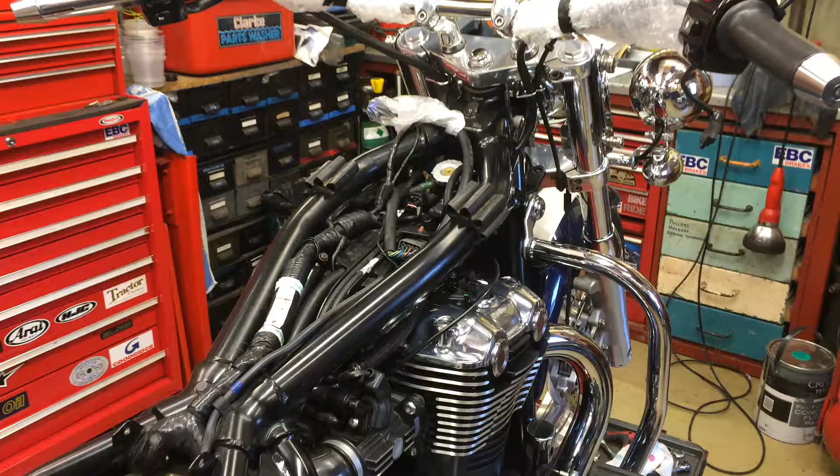Okay, this is the fifth and final video in my series of checking and adjusting valve clearances on a Triumph Thunderbird 1600. It's a recap of where I am to date. The job is finished.

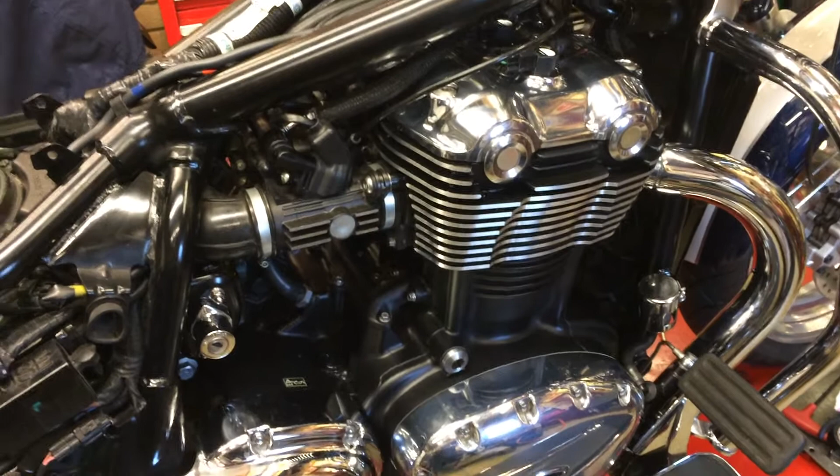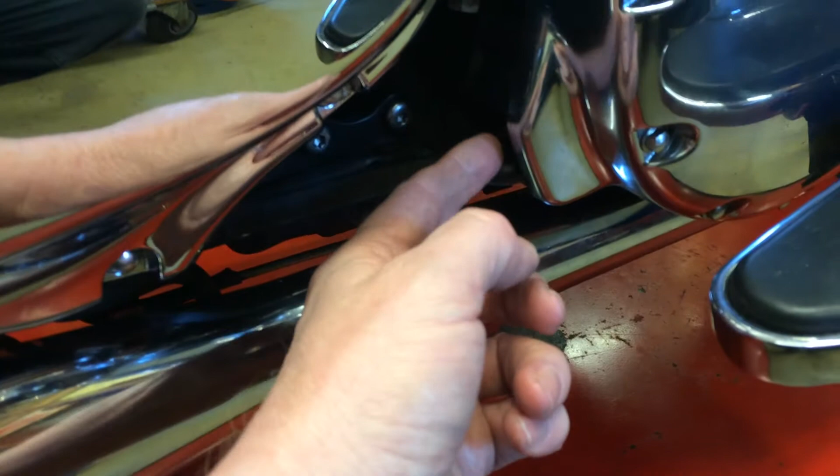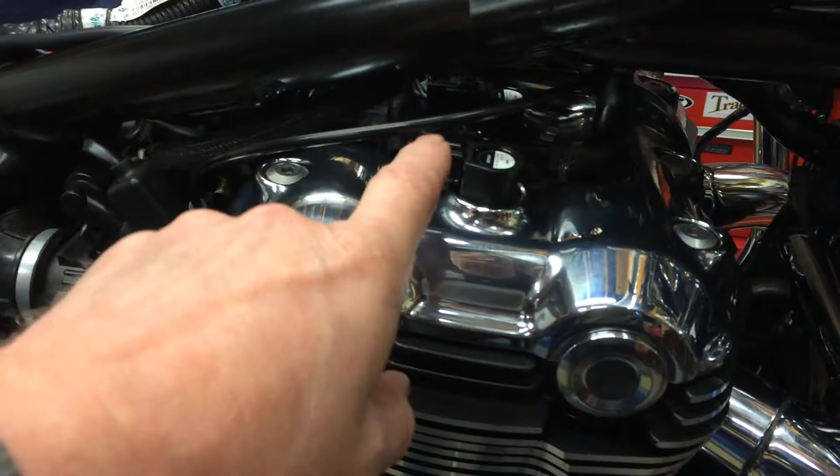Last video I was just in position where I was refitting the alternator cover and I'd got to put the cam cover back on. So the alternator cover, straightforward, a new gasket between the sealing faces. I'd already in a previous video put new sealant around the back of the grommets, which take these two cables, one from the alternator and one from the crankshaft pickup. Case goes on, torque it up to specified setting, then the cam cover goes on, a bit of a jiggle to get it in, and I also put a new seal on there as well.

On the seal itself, there are four D sections, two at each end, and you have to put a small amount of silicone sealant on the cylinder head before you fit the new seal.

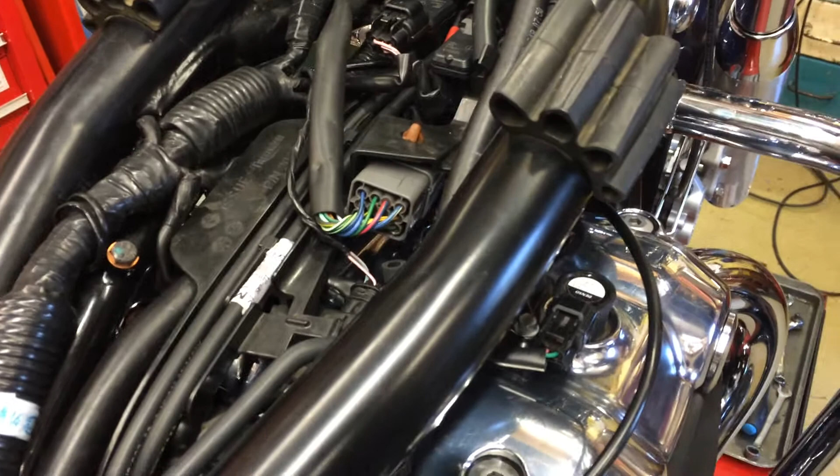Once you've got the head cover or the cam cover back in place, you have to just lift it up again so that you can refit the cam end shields, which I believe are purely cosmetic, and have an O-ring on the back to hold them in place and secure them. Torque the cam cover down, that goes down to 12 Newton meters, and there is a specified torquing pattern in the manual.

Once you've got that done, refit the spark plugs. Because it was a 12,000 mile service, I was putting new spark plugs in anyway, so they were gapped. Put them back in, and you torque them down to 20 Newton meters. Refit your coil packs, get your connections back onto the coil packs before you put anything else in.

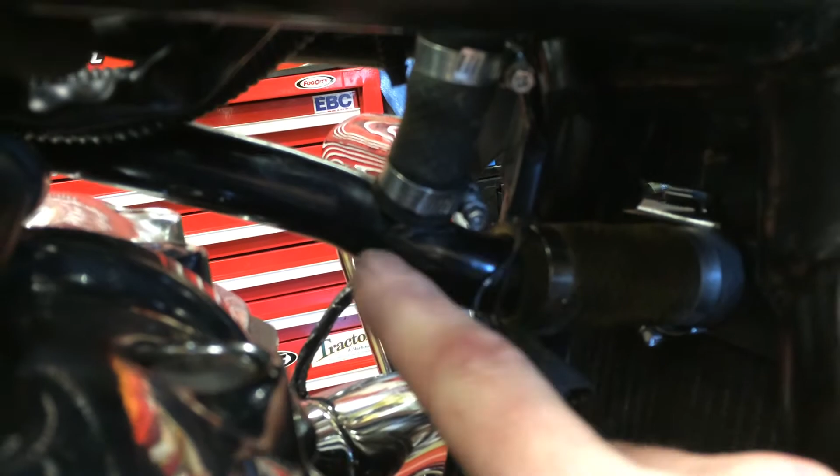So once you've done all of that, the next thing to go back on is this coolant pipe that runs right across the top of the cylinder head. Simple, just a reversal of getting it out really. It slides first into this radiator top hose, so slide that end into there and then drop the back end into the thermostat housing, which is in there. Tighten the clamps up, then refit the filler hose here, tighten it, clamp up, and then that just bolts back onto the frame underneath the headstock.

Fill it up with coolant. I've used this Motul Motocool. It will mix with anything that's already in the engine, and I thought I was going to get away with it. The engine specifies 2.2 litres, and I thought because I hadn't done a full engine strip I'd probably get away with 2 litres. I didn't. I had to go back and get another bottle. So you can see I've had two full ones of these and that amount out of there. So you do need to get the right amount of coolant.

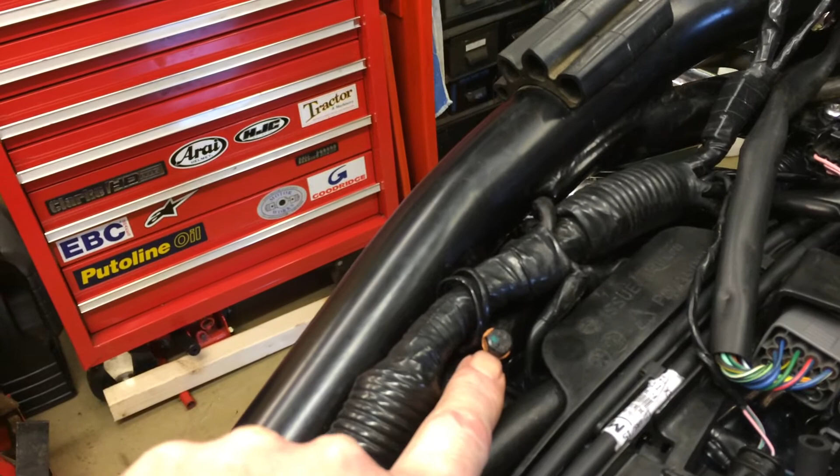I trickled the coolant in an attempt not to get too much air into the system. Nice thing is that it's got a little bleed plug here, so take that out, fill the system up, coolant runs out of here, put the bung back in, job done. I did install a new copper washer on there.

So that done, it's then just a case of getting all of the cabling back in and just plugging everything back up. Not a problem. I couldn't remember how this arrangement sat here, but again with digital photographs, I took some photographs on my phone, and it was great, a great assistance.

And that's the job done really. I have started the engine up. It sounds fine. I'm pleased I did the job. It did need doing, obviously, because I had 3 shims that were out of spec.

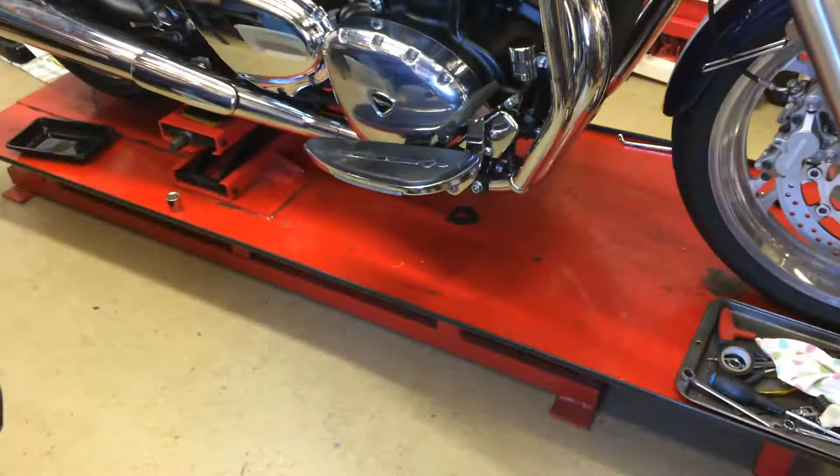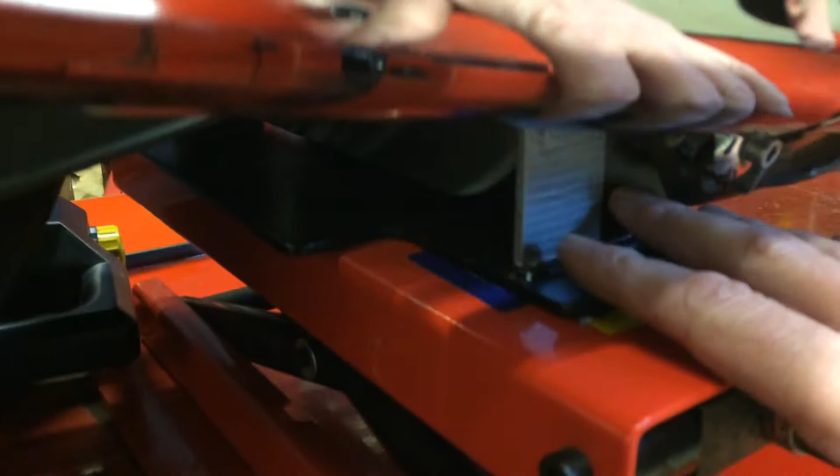What do you actually need to do the job? Well, I'm fortunate, I do have a bike lift. It does mean that you can get the bike up and down into a nice position to work on it. Because it's a cruiser, it doesn't have a centre stand, so I invested also in what they call a plate jack here, and also Triumph do this stand which comes up underneath the footrest hangers, which is there. I've got it covered in gaffer tape to stop it taking paint off, but you could fabricate something like this, but I do believe that you need something like that arrangement so that you can get the bike in an upright position.

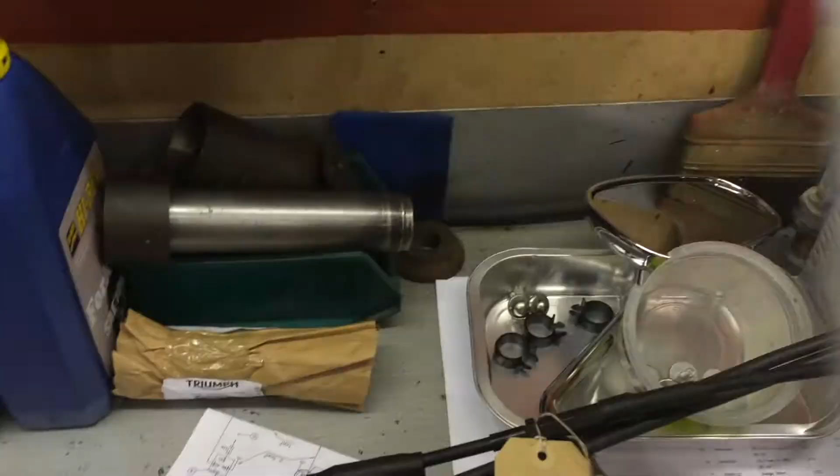On top of that, you'll need some special tooling. First and foremost, you will need the Triumph Thunderbird workshop manual. I picked that up off the internet on a disc, but you wouldn't be able to do it without it. I don't believe anybody else does a workshop manual for it, and you need it. You can't do it without it.

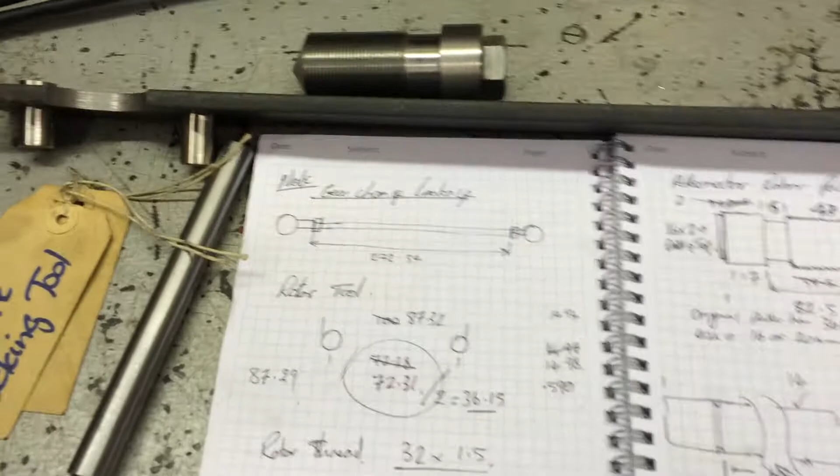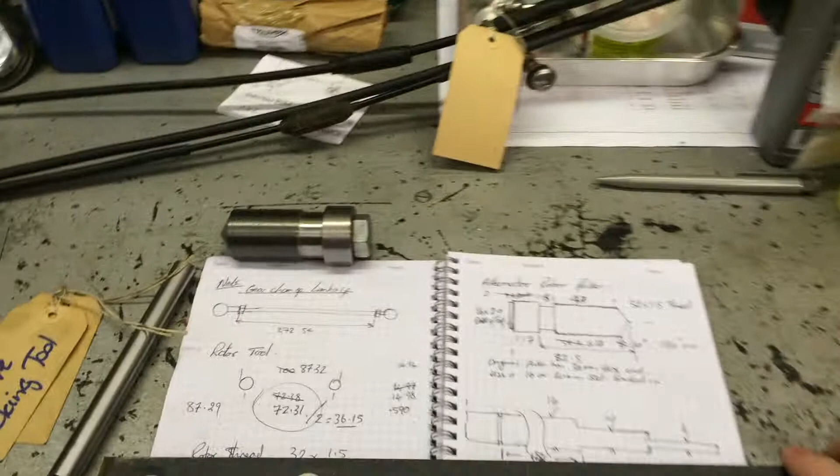Next, you will need this baby, which is the tool for holding the alternator rotor. I did discuss the dimensions of that in a previous video. You will not be able to get the rotor undone unless you can hold it.

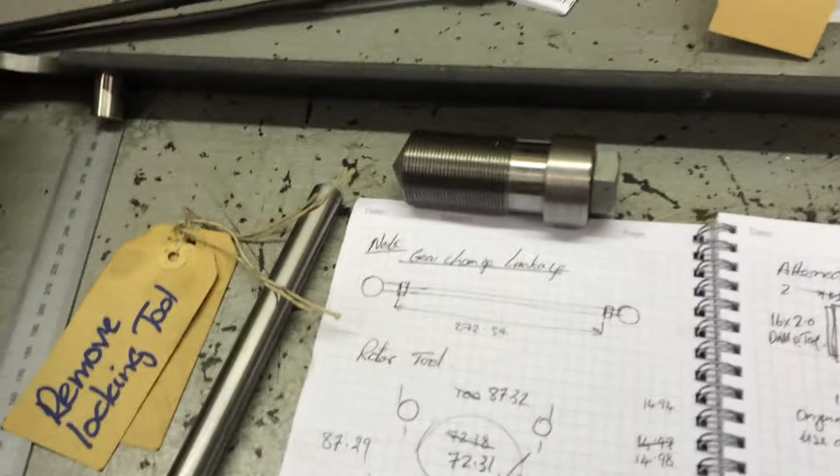Once you've got the centre nut out of the rotor, you'll need the puller, and this is the one I made. For those interested, the dimensions are: from the tip to this shoulder is 82.5, the thread length is 47, this relief is 15mm, and this shoulder is 17mm.

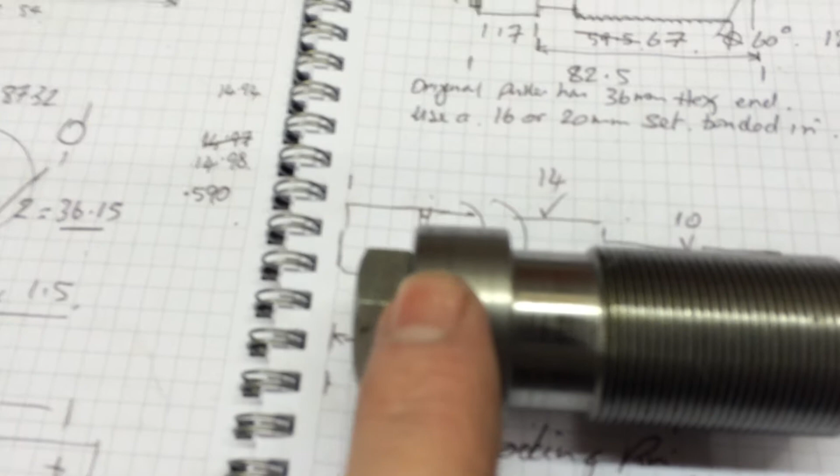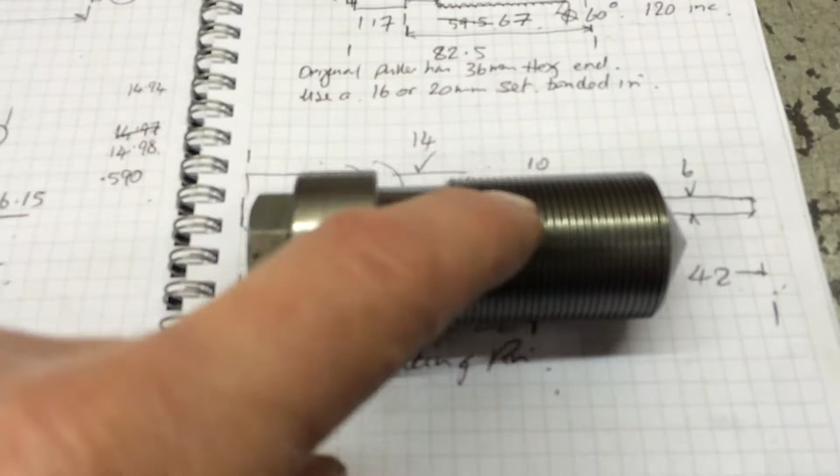All I did was drill it and tap it to take a 16mm bolt, and then held the bolt in with some high strength retainer, because you're only ever putting force on it in the direction that tightens this bolt up anyway. But I did just put some retainer on there to hold it in place. The thread itself is 32 by 1.5 pitch.

And the nose is 120 degrees inclusive on the angle.

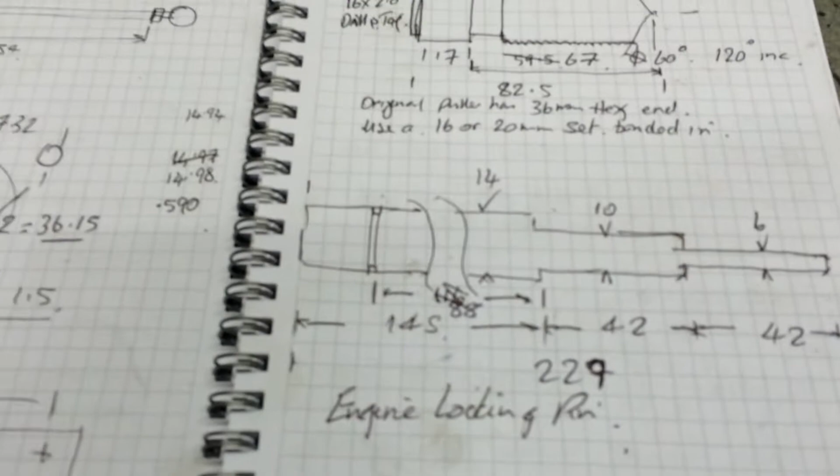So once you've got the rotor off, then you need the locking tool for locking the crank in position whilst you take the cams out, do the valve timing, etc. So that's this pin again, which I made.

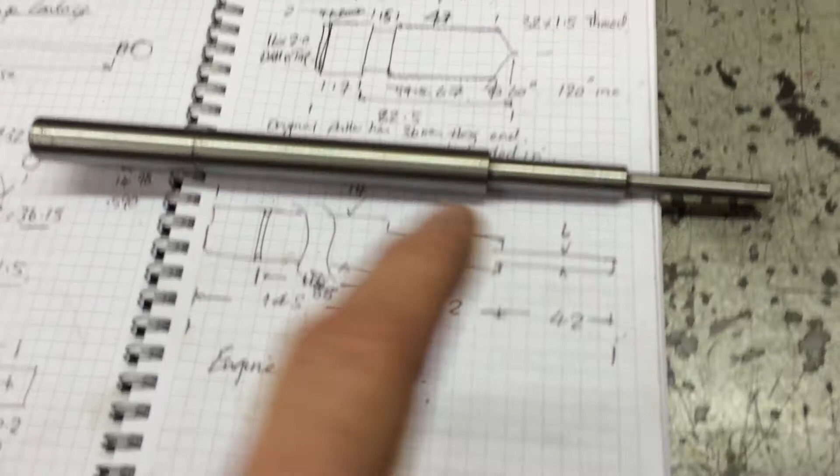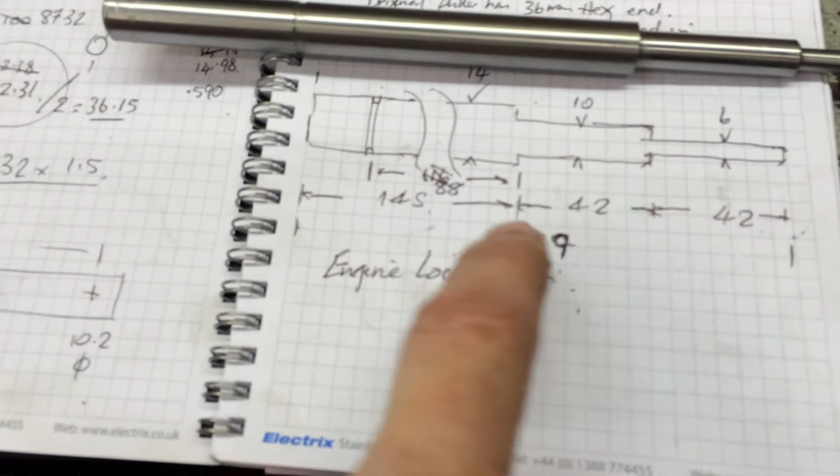Basic dimensions is 6mm diameter, 10mm diameter, and then this was just a nominal 14mm diameter. The two reduced reliefs here are 42mm each, and then the other one is 145mm.

In all honesty, that could have actually been a little bit longer. It was okay, but a little bit longer, and ideally a knurl on the end would help you get it in and out.

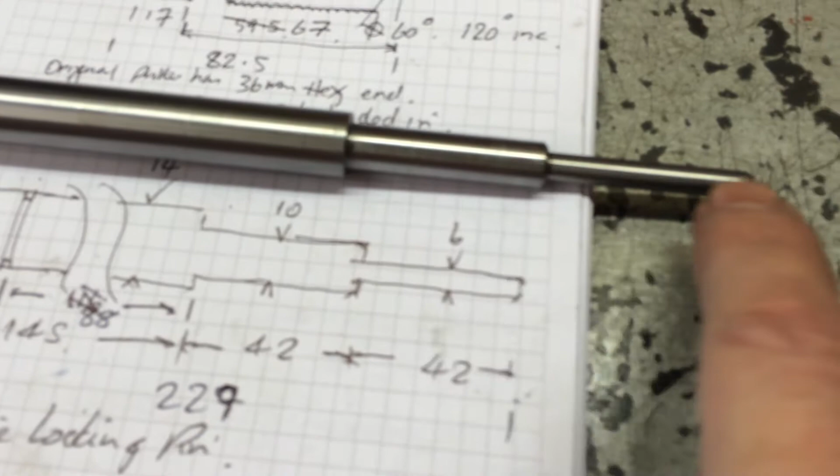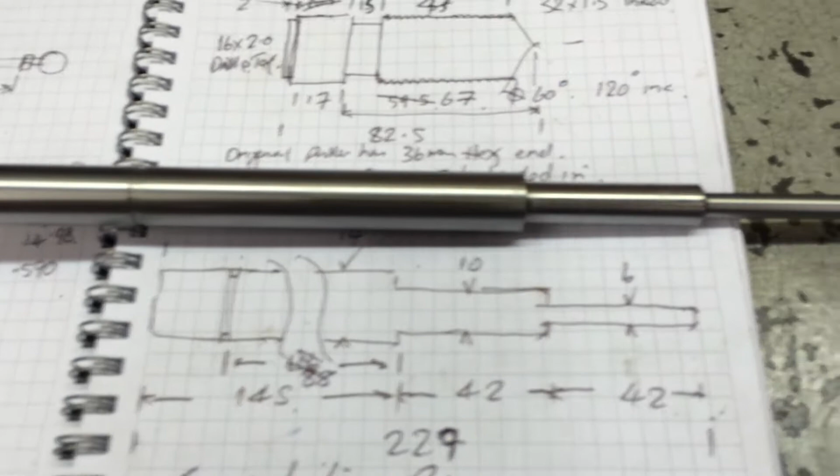What I did here, a nice generous chamfer on these two here, and then also I put a groove here which is 88mm from this shoulder to the groove. The reason I put that on there is it was very difficult to tell when you'd actually got it in place, and the design of it is really quite poor, because this tip is so weak.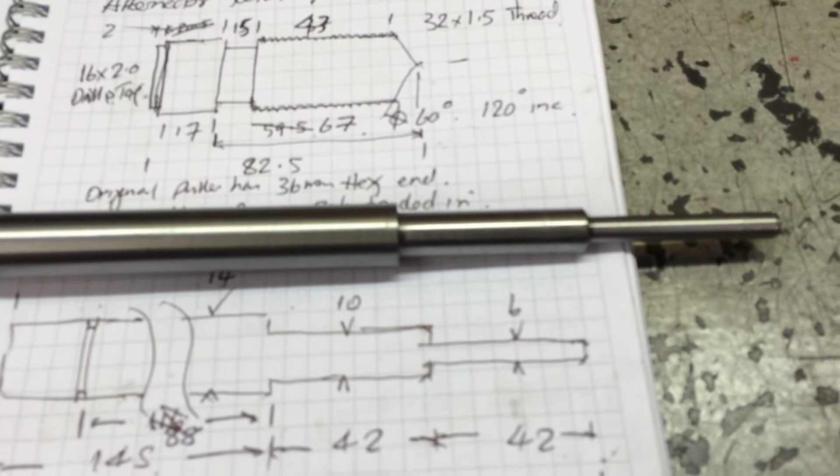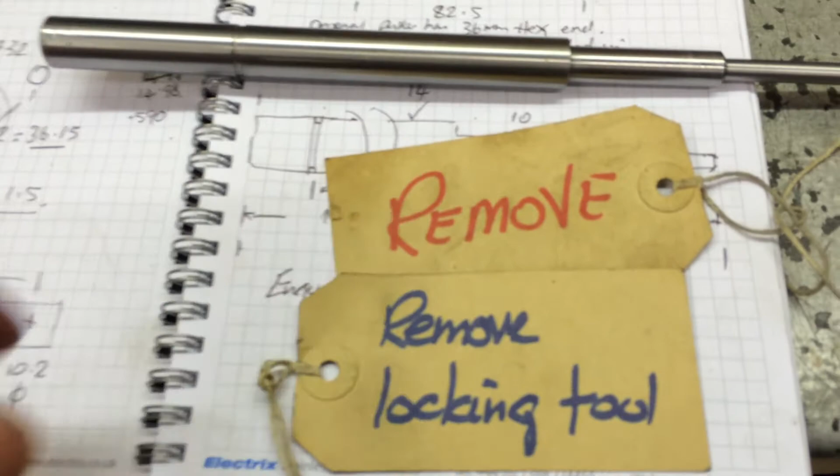Once it's in place, it's very easy to actually just bend it, so you have to be really careful. What I did was I made these tags up and put them on various places just to remind myself the locking tool was still in place before I tried to rotate the engine, because I did actually tweak it once and had to set it back up and straighten that. So it very easily bent, very, very weak in its design.

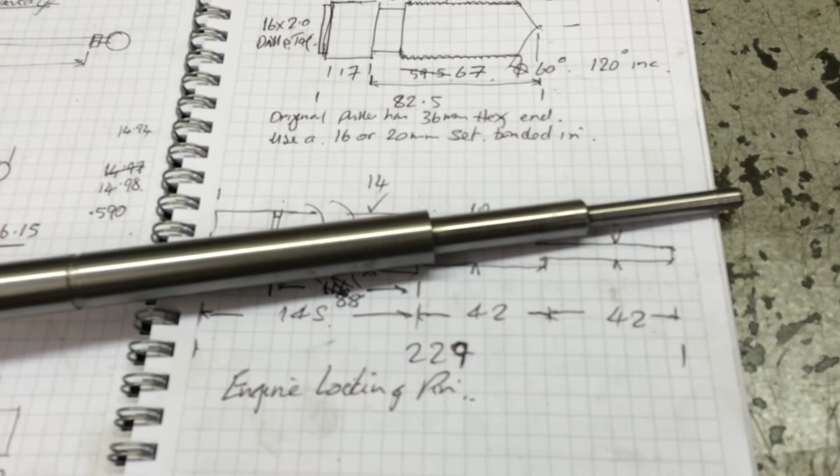However, it does do the job, and you won't be able to change the shims without the locking pin in place.

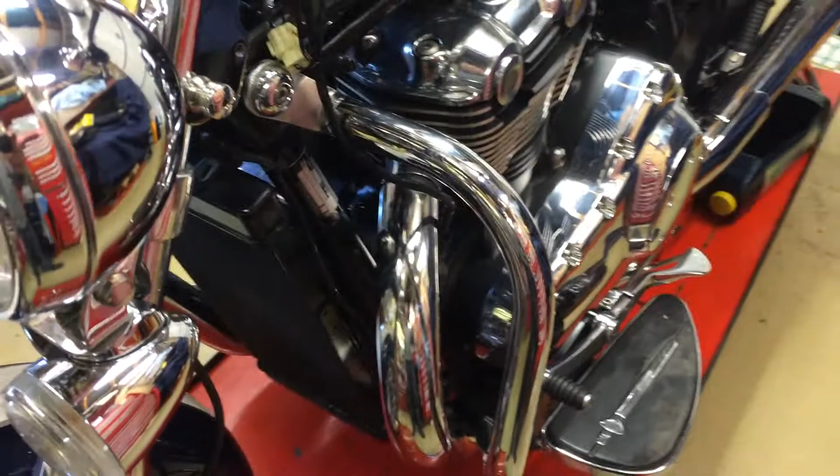On top of that, I do believe you need a good toolkit. I have a very good selection of spanners, a quarter drive socket set, 3/8 drive socket set with two 3/8 drive torque wrenches, and then we go up to the 1/2 inch drive socket set with the big torque wrench you'll need for pulling the alternator rotor bolt up to 165 Newton meters, which is a struggle on your own. Made me puff.

So the job's done. I'm pleased I did it. It was difficult, and it had me struggling on more than one occasion, but job done. I have started the engine up. It sounds nice. So yeah, good job done.

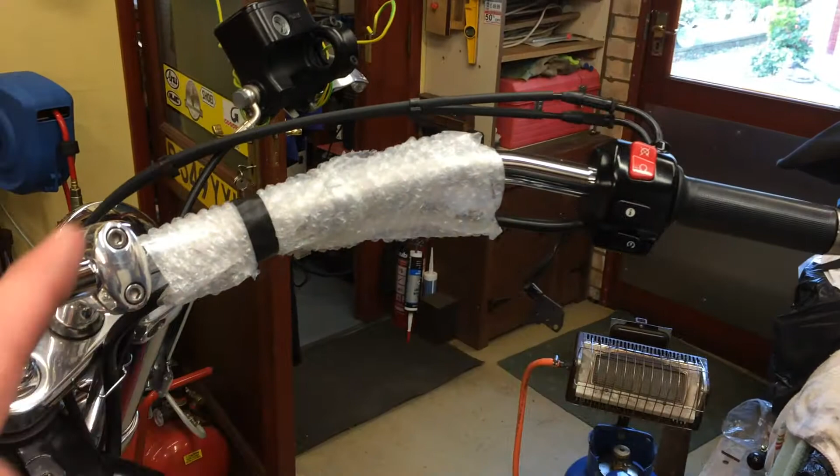I did mention in one of my previous videos that I was going to change the bars, so I've started that already. It's going reasonably well. The throttle cables, you have to put new throttle cables on, longer ones, and I ended up taking this injector body back off again so that I could get in there to release the cables.

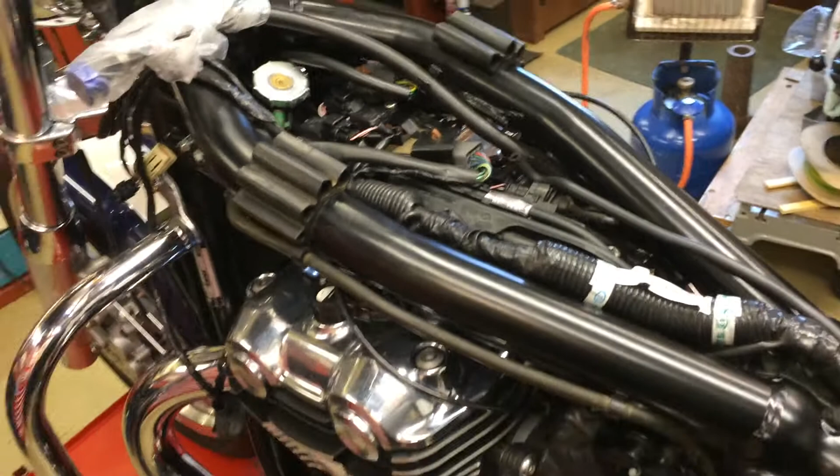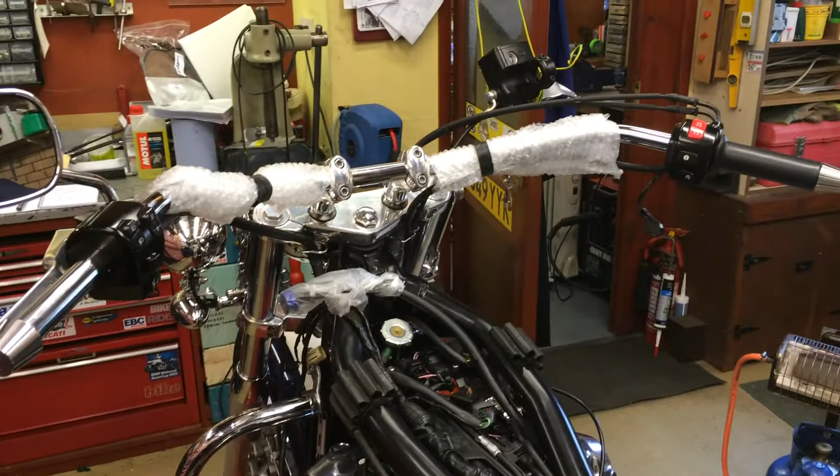So I'm not going to dwell on anything else too much. If, during the course of changing the handlebars, anything comes up that I think is a point of interest, I'll probably just do another short video on that.